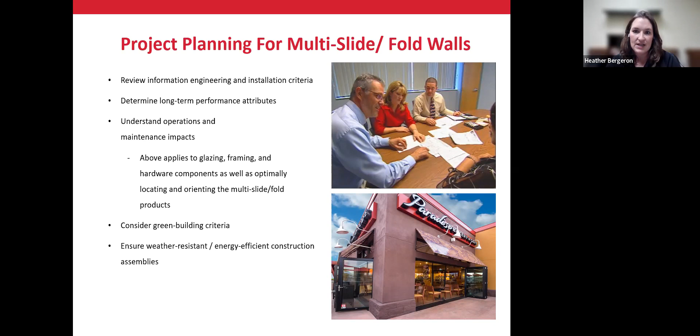On your front end planning, you have performance specifications to review, structural loading factors with the structural engineer. You have the option of including the ratio of glazed area to framing area. Consider the full facility life cycle of that particular project, and match their performance with other buildings, systems, and their lifetime performance.

There are many varied applications within these systems, whether that's commercial, institutional, including universities, K through 12, or any university like University of Phoenix, UT, A&M, University of California, University of Florida - these systems can also be included in those kinds of projects.

You're accessing these particular openings to the outdoors. You're adding light, air, and not obstructing any views. You're maintaining connections and visibility to adjacent spaces. You also have special applications for flexibility, whether that's classrooms, workspaces in an office setting, a conference room, or just a workspace application. And then of course, indoor-outdoor living, which would be hospitality, restaurants, resorts, and residential applications.

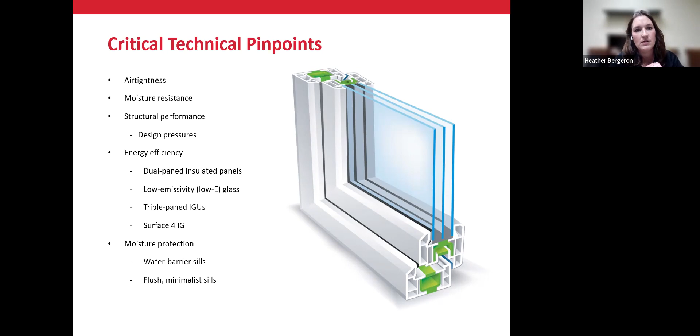Another pinpoint to cover is that DP ratings do matter across the nation - everybody is different depending on the design pressure of the particular system and the size you're looking to incorporate. You also want to think about critical green building factors: your NFRC certifications, ANSI standards, and of course your AAMA performance ratings.

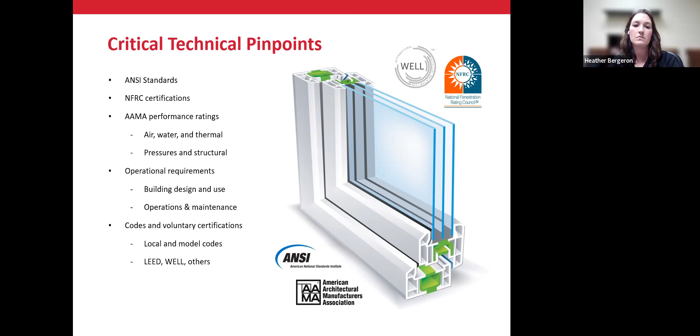Economic and market factors: there are many business cases for operable glass wall systems. By including multi-slide or bifolding systems into your space, you're improving the sales of that particular project, depending on what location of that space you're looking to incorporate the opening into, whether that's residential or commercial.

Also your leasing values - when incorporating these projects, you tend to have more improvements and investments into the space, so you're able to charge a little bit more to your tenants, or if you're in a restaurant, per table, having these systems. You're leaning more on indoor-outdoor spaces, sustainable design benefits, including these particular systems into your projects, and then the overall appeal of operable facades in various sectors.

Incremental revenue - again, you are able to get more return on investment in your revenue whenever you're incorporating these particular systems into your project.

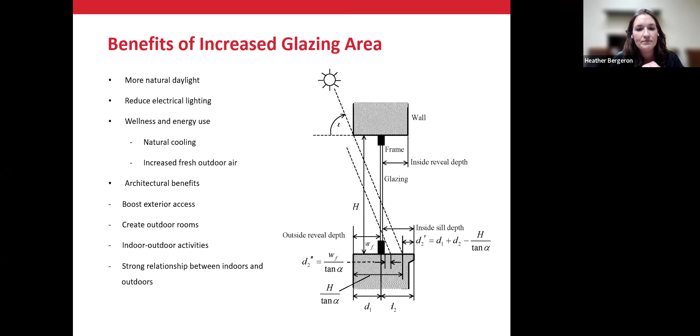Another benefit is the psychological benefit. You're showcasing the outdoor experience and happiness within this space. You have this small space here and you're transforming it by expanding the window wall system into a small area, so you're capturing that outdoor square footage.

The appearance with larger interiors gives that psychological appeal. You're adding daylight, maximizing your view, and transforming and expanding a smaller space into a larger interior.

Different system types and configurations: you have a stacking option if you're using a multi-slide, or pocketing options, which we covered previously in some other projects.

Framing materials could be aluminum or aluminum clad. Finishes can be anodized or painted, depending on your manufacturer—you can use their particular painted finish, typically a 2605 finish, or go custom paint. You can match any Sherwin-Williams, Behr, or Benjamin Moore paints. All you have to do is provide an actual color chip sample, and the manufacturer can match it, then you sign off on it.

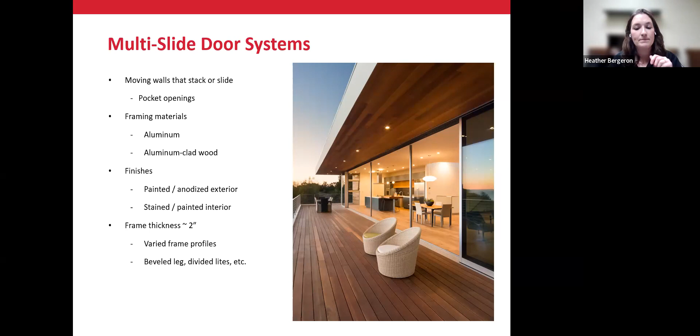Bifolding systems: you never want to order a system that doesn't have stainless steel tracks. Having stainless steel tracks makes it easier for that particular system to operate efficiently, and it's more of a fit and finish look.

Whether you're bifolding, biparting, or adding something that's stacking to one side, whether you have a personal door or a daily door, whether that's on the jamb or actually on the panels as you're stacking it to one side, you may include a single or a double swing door.

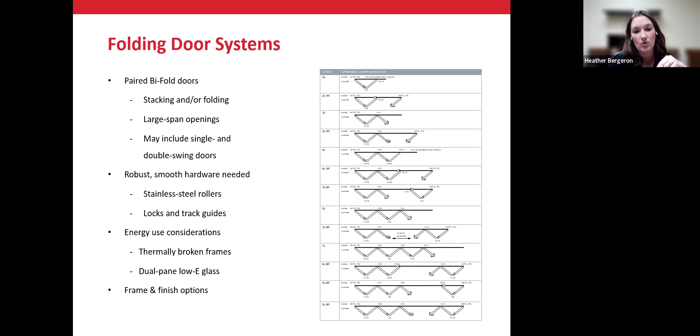The doors, depending on the manufacturer, also match a hinge door option. So if you have a bifolding door in a pool cabana or off the porch area onto a pool, or a hinge door off a breakfast area or dining area, you're able to match that hinge door with a bifolding door. Again, stainless steel rollers, lock and track guides, thermally broken frames, low E 366 dual pane glass, and your frame and finish options.

Sliding glass door systems, or a single track system, give you the option of 2-panel, 3-panel, or 4-panel stackable options, in configurations like OX, XO, OXO, OXXO, depending on your type of different configurations. You can also go custom depending on your manufacturer, you can ask for that request.

Again, for frame and finish options, you have that narrow profile frame, about 2 inches, and of course depending on the manufacturer you have other varied options to choose from. Energy considerations are taken into account here too, with thermally broken frames, low E 366 glass depending on where you're located, and smooth hardware of various different styles.

So again, you have very operable, accessible options here. You're able to incorporate a swinging or a hinge door option into window walls. You can also mull direct sets in a window wall to a sliding glass door, as well as a multi-slide or bifolding door, with additional structure by others. And then again you have the casement and hopper options, depending on where you're located and what your clients prefer.

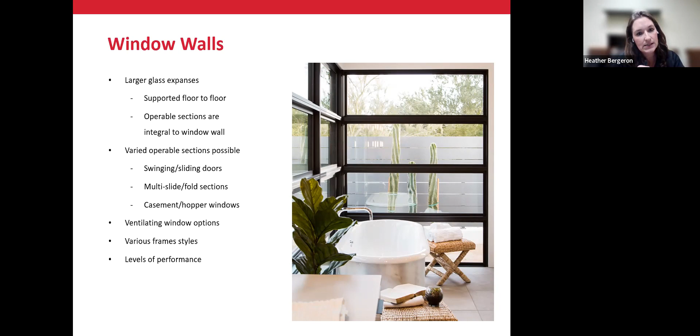Looking at this facade here, there is a desired window to wall ratio whenever you're building that orientation of a particular project. On average you're anywhere from about 40 to 80% whenever you're looking into the building orientation here, as far as the rough openings of this particular project.

So therefore you have more daylight availability, more heat and glare that you're thinking about here. That's where the window to wall ratio comes in, and again your key energy codes, whether depending on your DP ratings and your performance grade.

So general principles here, architectural strategies for glazing and shading - you're wanting to reduce unwanted heat gain within that window to wall ratio, and again maximizing useful daylight harvesting. You want to consider your key variable data, whether that's NFRC, all your solar heat gain coefficients, your VTs, your U factors. That's also going to depend on where your project will be located here in the US.

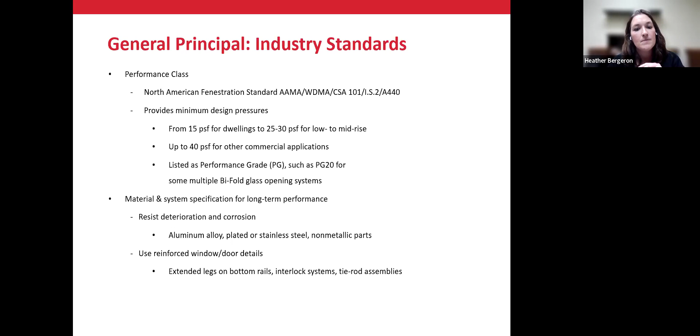So your product craftsmanship for long-term performance is all included within those decisions and your preference here. The uses of benefits and return on investments.

Market differentiation here, you're accessing those outdoor amenities, displays in recreational periods. Again, we're here year round or seasonal. You're distinguishing yourself from the competition. So instead of having a client that would like more possibly a hinge door option with a single hung on the side, you're able to open up that space and have good return on investment. And it distinguishes yourself from that competition and that word of mouth saying, hey, this particular architect or contractor I'm working with, instead of just having a standard kind of configuration or operation, they actually incorporate multi-slides or bifolding systems into their space.

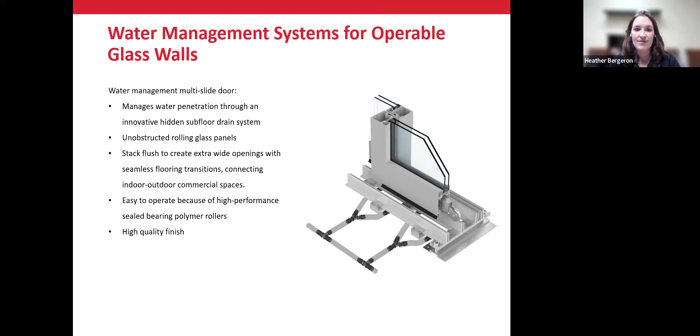Water management systems for operable glass walls. So within a multi-slide door system, you have an option of a subfloor drainage system, so you're not obstructing any rolling glass panels. You're stacking the flush of the panels to add those additional wide openings. So this particular water management system is a seamless flooring transition into a commercial or residential application. It gives you that high quality finish, and you're able to have the sealed bearing polymer rollers within the system.

Again, you're tested. Good manufacturers always provide testing data or performance data sheets on the particular systems you're looking to incorporate into your project — wind load or water infiltration information. Again, you look at your certifications, whether that's NFRC or AAMA. You want to always make sure that the manufacturer you're looking to incorporate in your project is AAMA certified.

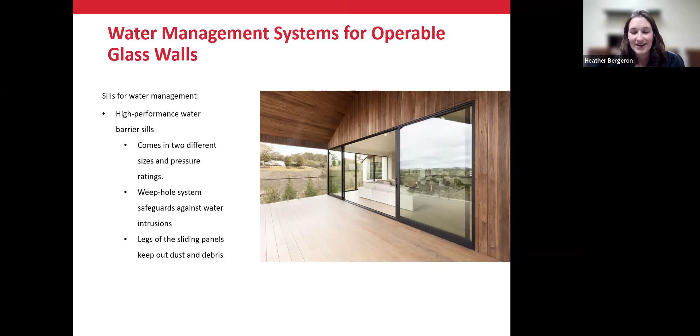Different sills for water management. So you have high leg or high performance water barrier sills. They come in different sizes and pressure ratings, depending on that particular system that has been tested. You do have a weep hole system on the exterior of that particular system that safeguards the interior from any water intrusion. Also, you want to make sure you have the proper overhang as well, because here in Texas we get wind-driven rain. I'm sure there's other parts of the US that also get wind-driven rain, so you want to make sure you have the proper water protection against rain protruding into any indoor space.

You also have the option for a flush sill with proper overhang. It lines up with most interior flooring. You also have the option of recessing the flooring into that space, again providing a smooth transition to the outside. Again, your weep holes allow the water to drain away from the system.

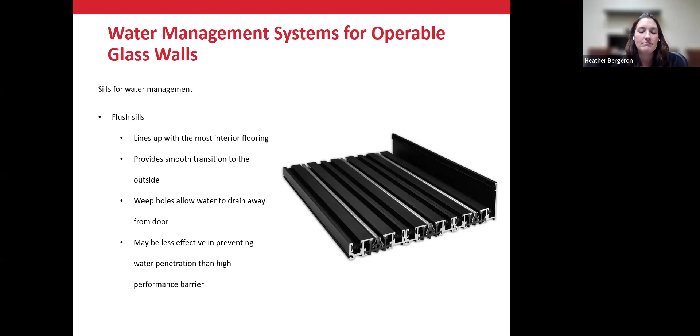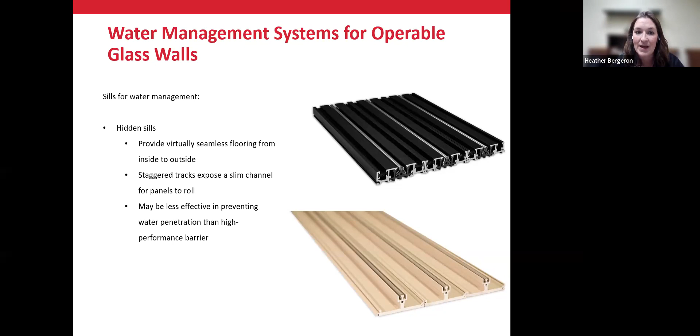And then you have your hidden seamless sills. This particular sill can be offset, so again you have seamless flooring from the inside to the outside. This hidden sill would depend on the type of flooring application you're using, whether that's concrete or tile — that's particularly the flooring application where you would see these hidden sills. Obviously, you don't want to use wood in between here, since there's no way for this system to weep away, so therefore it would have to be drained by others.

Installation and application notes. Every entrance design must weigh aesthetics against life cycle costs and operations. Not all operable glass openings are created equal. You always want to make sure during the design and installation process that all your openings are plumb, level, and square, or else the system is not going to operate smoothly and efficiently like it should. You're going to have issues later down the road.

You may run into a situation where a bifolding or multi-slide unit might not fit into the project budget. There are other options as far as value engineering, like a sliding glass door. Later down the road, if a client changes their mind during construction and doesn't want a sliding glass door to save cost, due to the life cycle cost of the project things could tend to go up with change orders. You can choose a hinge door option instead. Other product options in a commercial application, or a pool area, could be an overhead door. But depending on the valued option, you want to make sure you have actual real data and not simulated data.

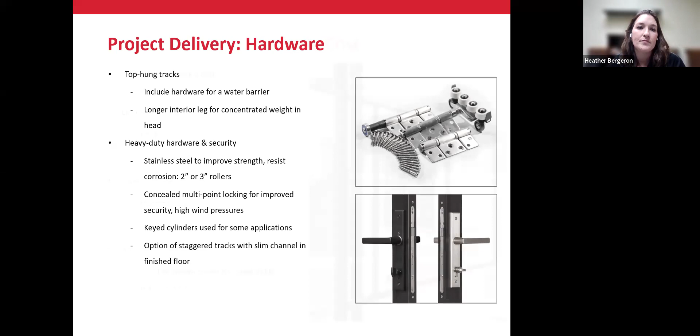Again, on project delivery and life cycle costs. When you're meeting with a client during the project planning phase, you're looking at first cost, which is the budgetary cost. Your operating cost could be during construction, and that could also entail change orders throughout the project or later down the road. Your life cycle cost would be towards the end of the project or the finished project, and that would be your return on investment.

These particular systems are sometimes a little pricey. It gives, like I mentioned before, that self-esteem boost. Over time and long-term performance, you will get the life cycle cost of these particular systems down the road.

Successful building and operable glass walls use bold, innovative techniques to blend the indoors with the outside, such as multi-slide and bifold systems, which make you happier and folks live better.